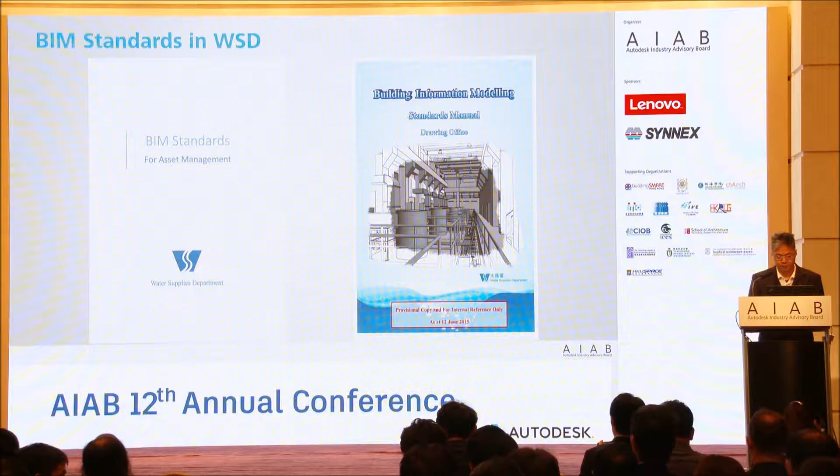Okay, let's get back to the pilot project itself. This is our first project using BIM in our design stage. The lack of reference projects with similar engineering nature and the adoption of BIM workflow has presented huge challenges to our in-house staff. Nevertheless, we have cleared the hurdles one by one. We have gained valuable experience in adopting BIM workflow and resolving problems specific to our project and have realized the benefits of migrating to this new technology.

The scope of our proposed work comprises the construction of Table Hill No. 2 fresh water service reservoir of capacity 24,000 cubic meters, together with auxiliary structures and associated earthworks, pipework, drainage, and roadworks. And we will also lay about 3.3 kilometers of water mains of diameters ranging from 100 millimeters to 800 millimeters.

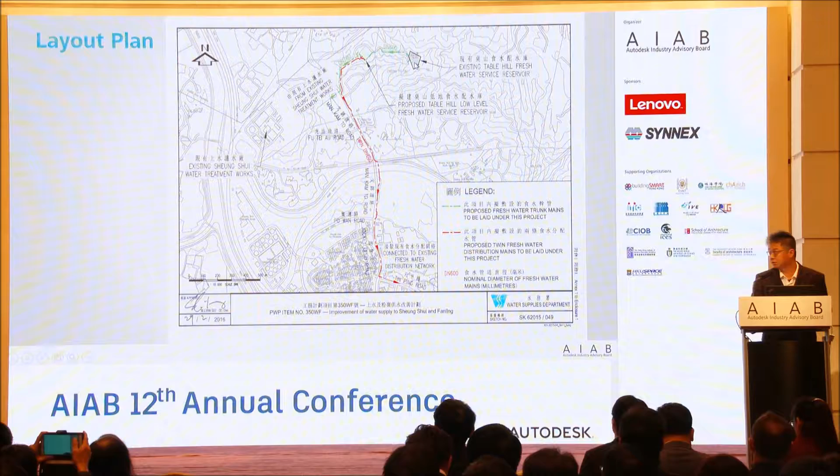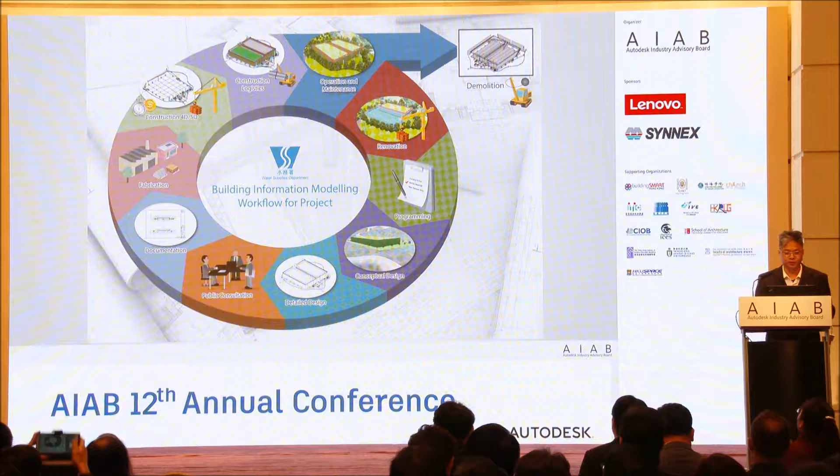This is the layout plan of our project. The proposed service reservoir is highlighted in green in the sketch, and the water mains are in red. And this is our existing service reservoir. We hope to use BIM in the life cycle of the project from planning, design, construction, and maintenance.

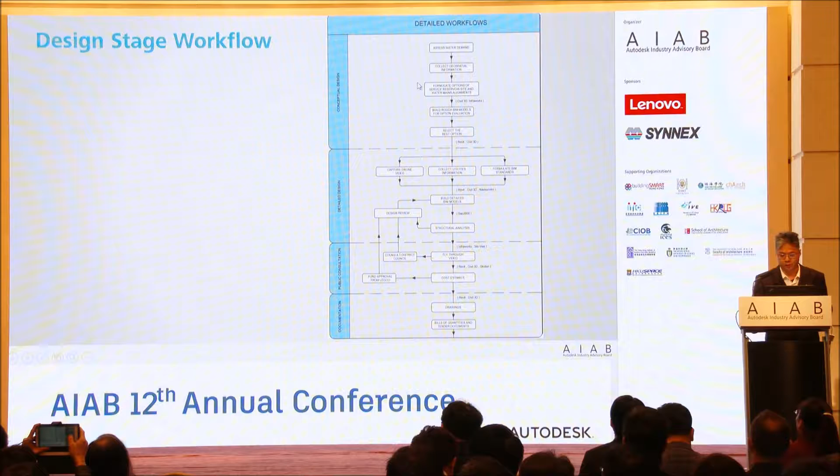We have set up a workflow for the BIM. I'm not going to go into the details. Instead of engaging a BIM consultant, we have a project team on our own for this in-house project. We engaged 4 technical staff to build the BIM model by ourselves. The software we use is Revit for the service reservoir model and Civil 3D for water mains and utility models.

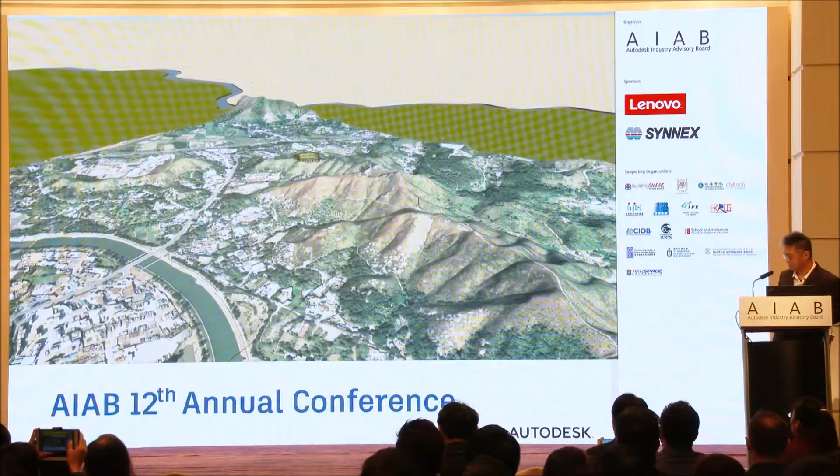Now this video shows the general terrain of our BIM model. We use the topographical data provided by the Lands Department for building this model. And the proposed reservoir is at the middle of the video. Okay.

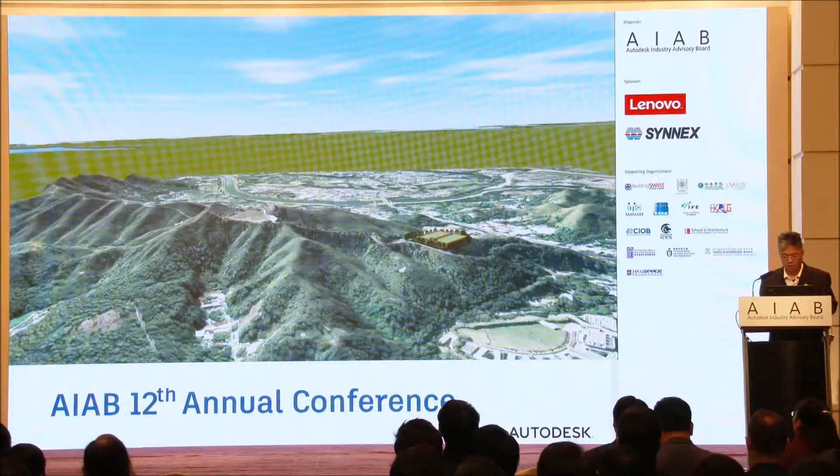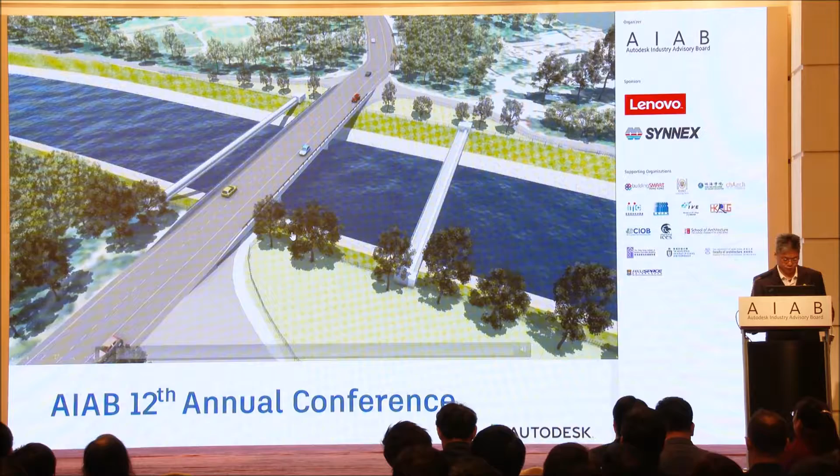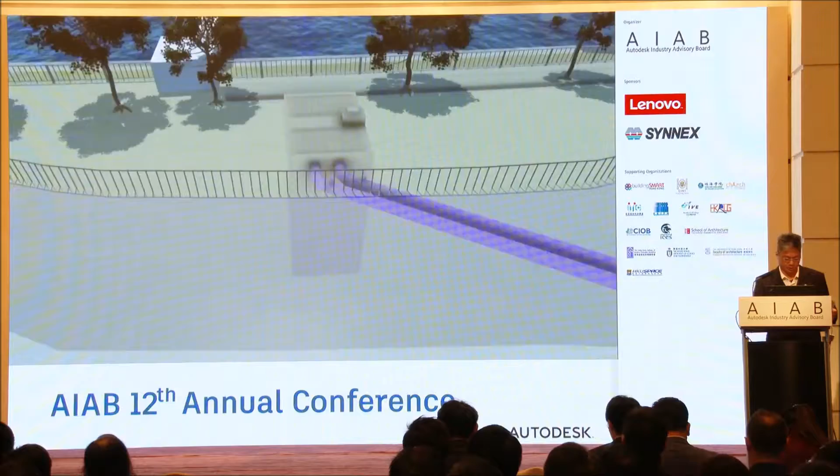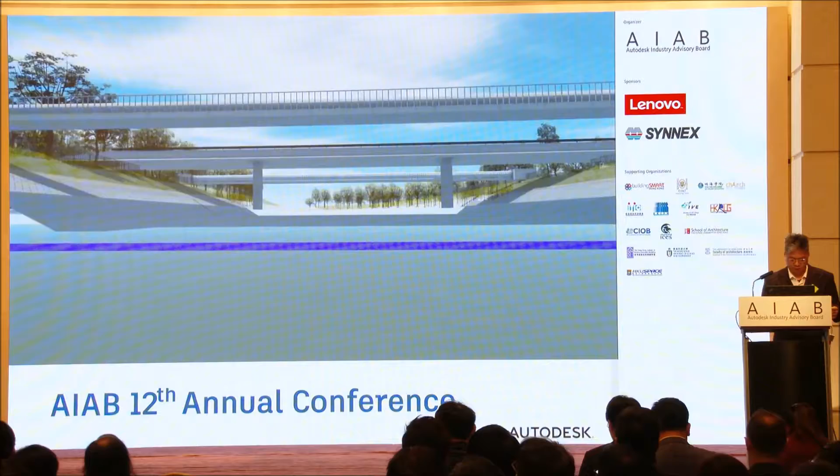The next video I would like to show is the fly-through of a section of proposed water mains, which will be laid underneath Ng Tung River to minimize the visual impact. We have included all details in the model. As you can see, we have included the pipe fittings of the water mains and also the ladders inside the chambers. All the dimensions of the pipes and fittings are based on the information provided by the manufacturers. Okay.

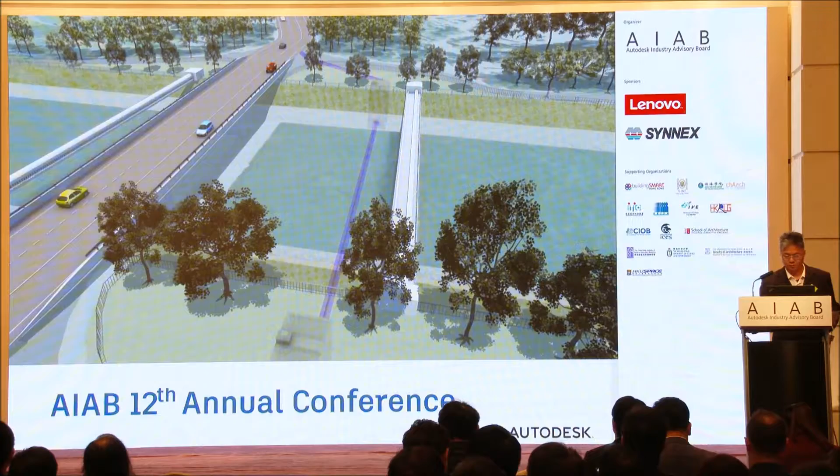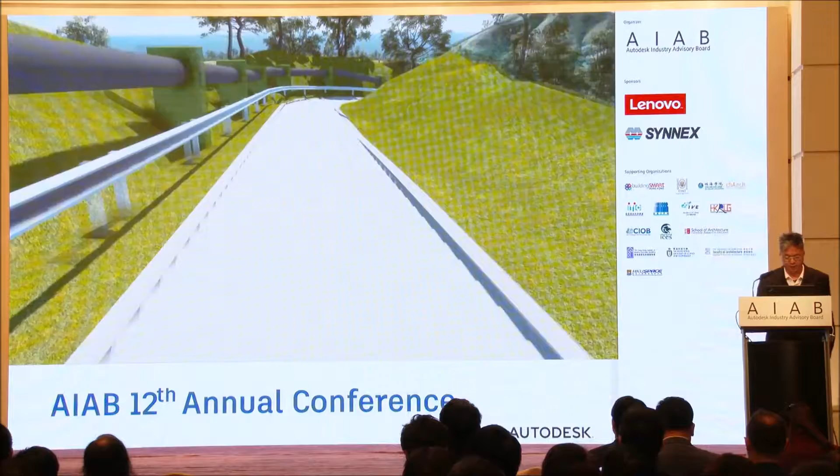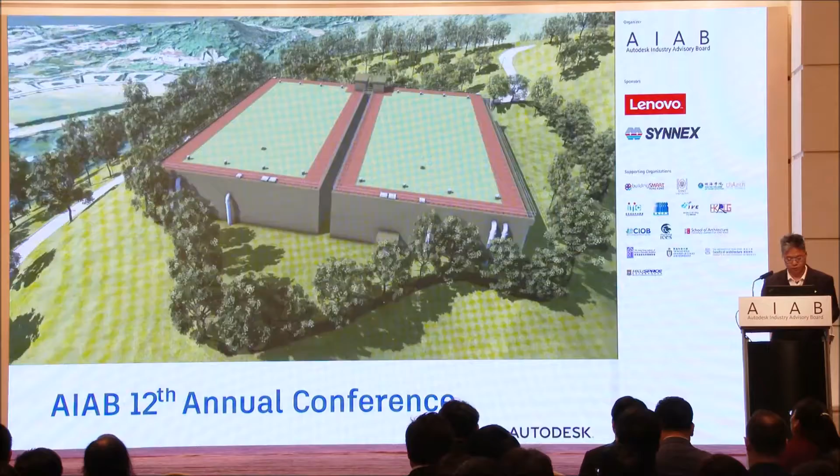This video shows a section of water main which will be laid as exposed pipes. And this is our proposed service reservoir. We have designed the service reservoir in such a way that it can blend in the environment. We will build a green roof and plant trees to surround the service reservoir. The walls of the service reservoir will also be green.

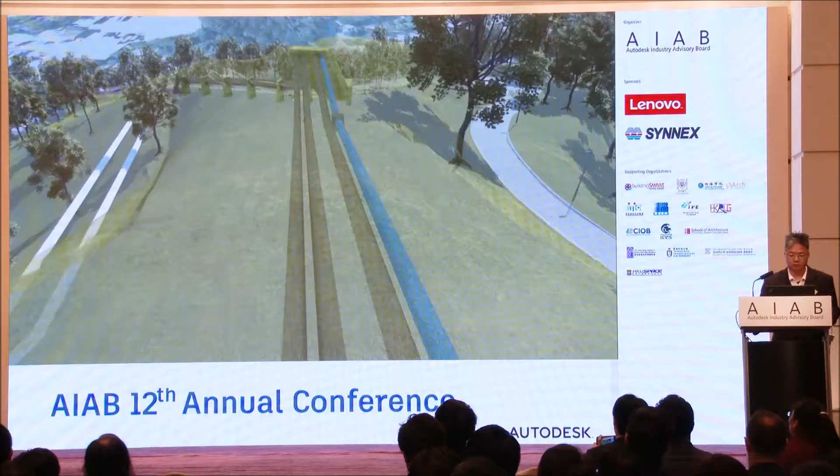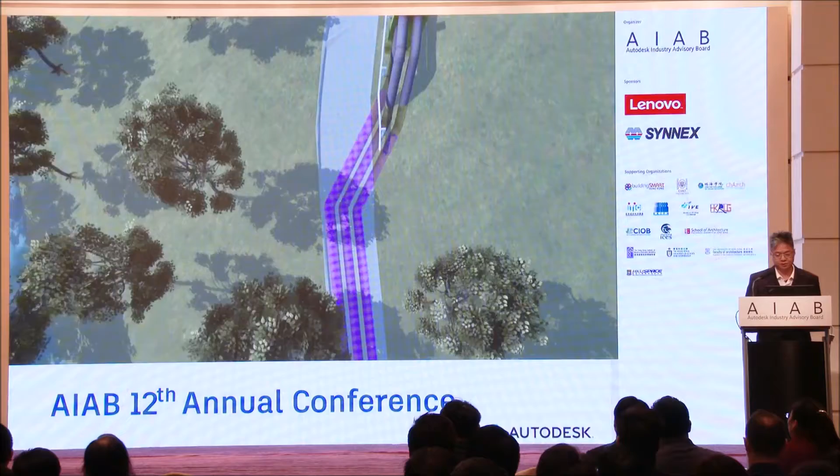And then we have a section of buried water main coming out from the service reservoir, and then going down a pipe trough, and another section of exposed water mains. As you can see, some of the water mains will be purple in color because at the end of the day, our fresh water supply system will be converted into a reclaimed water system.

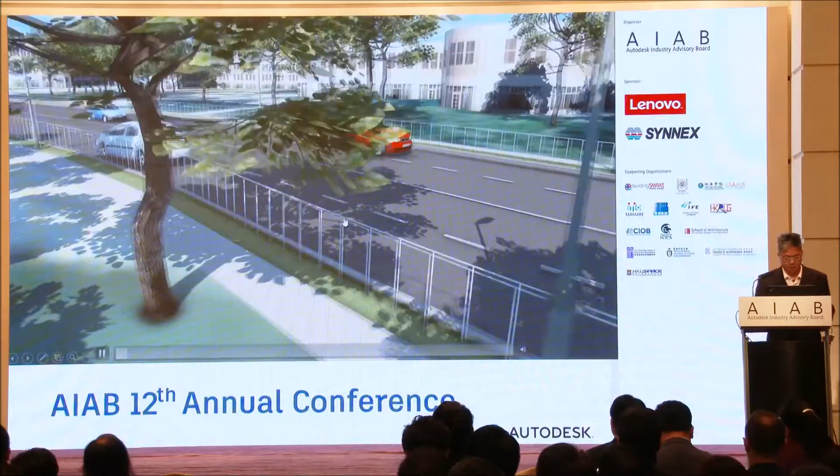This video shows some sections of water main laid underneath Man Kam To Road and Jockey Club Road, which are traffic sensitive. We have included all existing utilities, such as cables and drainage, in the model to perform clash detection analysis.

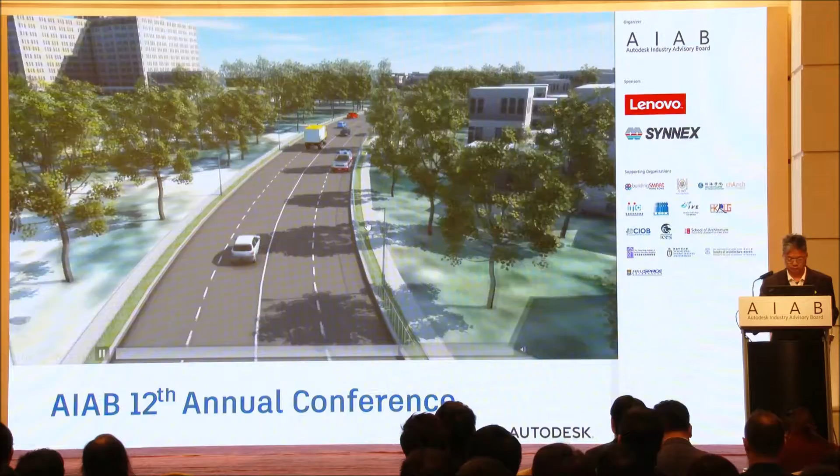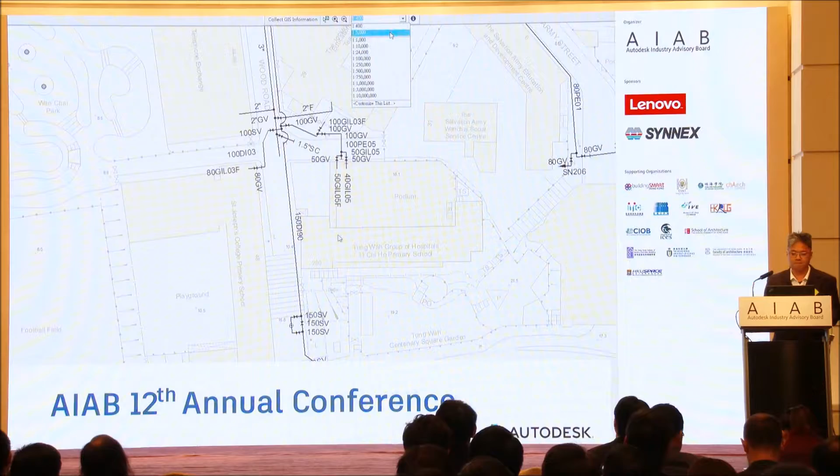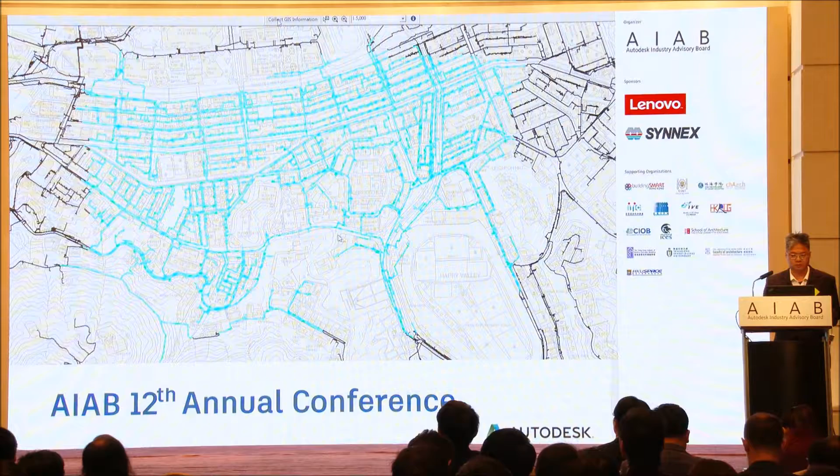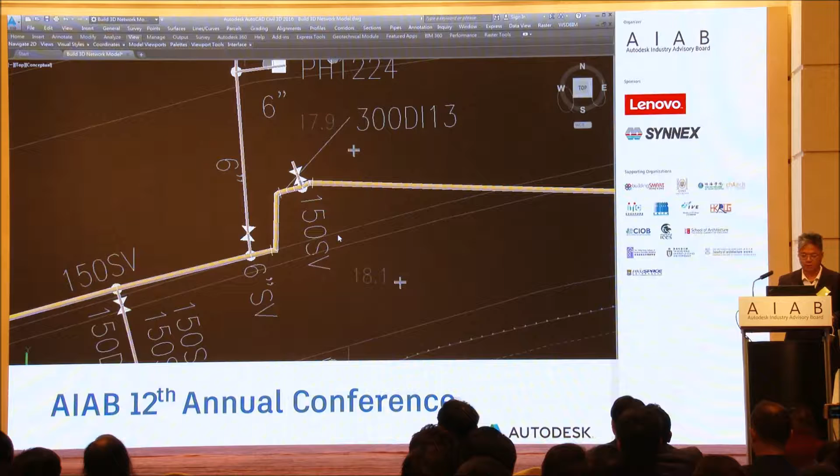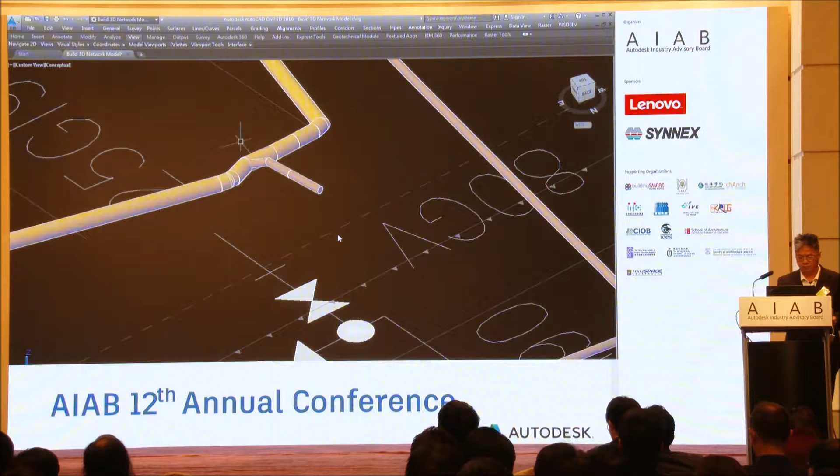Now we select a portion of our water main from GIS, and then we convert it into data in our Civil 3D. So that is it. All the 2D data are now converted into 3D data. And you can see part of the 3D model of the existing water mains. Okay.

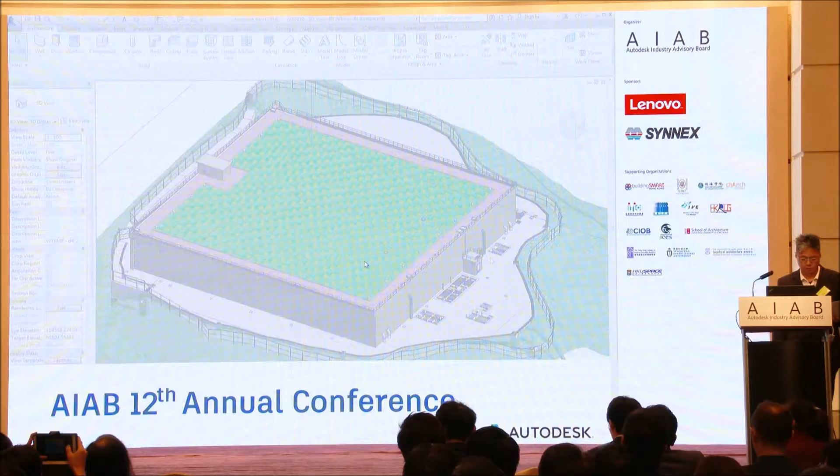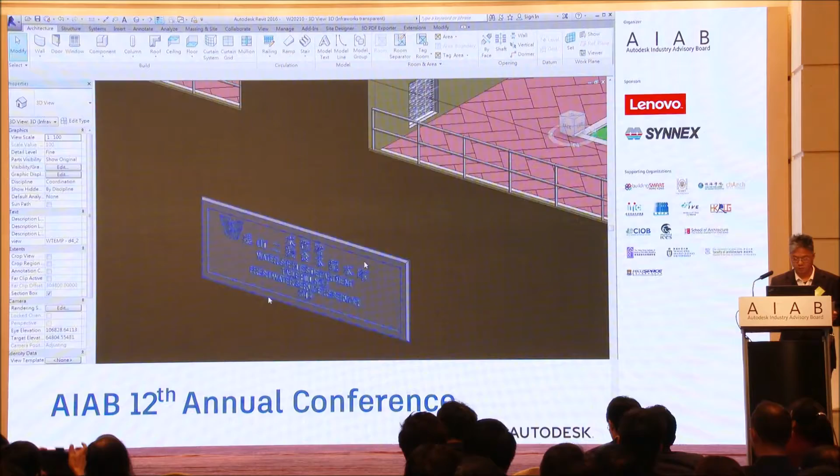The next video I would like to show is our service reservoir model in Revit. We try to include every detail, such as the nameplate of the reservoir, hand railings, pipe works, manholes, subsoil drains, and even the manhole covers.

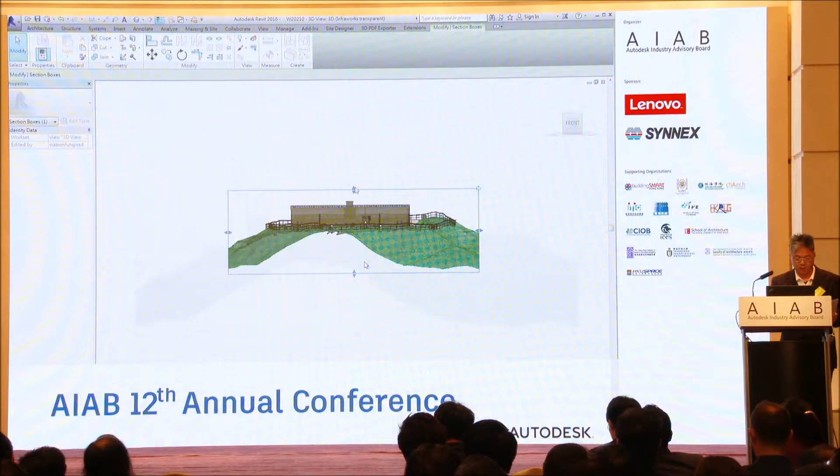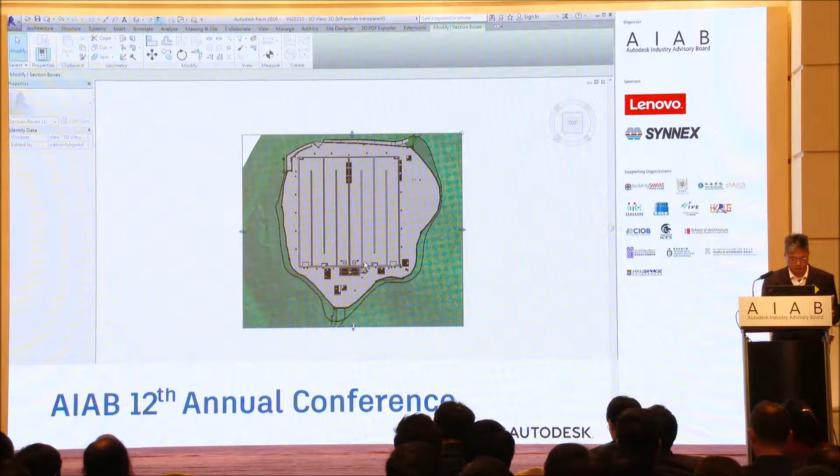By using Revit, we can view the model from any angle easily. We can also cut any section of the service reservoir for preparation of 2D drawings. In fact, all of our tender drawings are prepared by using this 3D model. And we can collaborate with other professions by using the same model.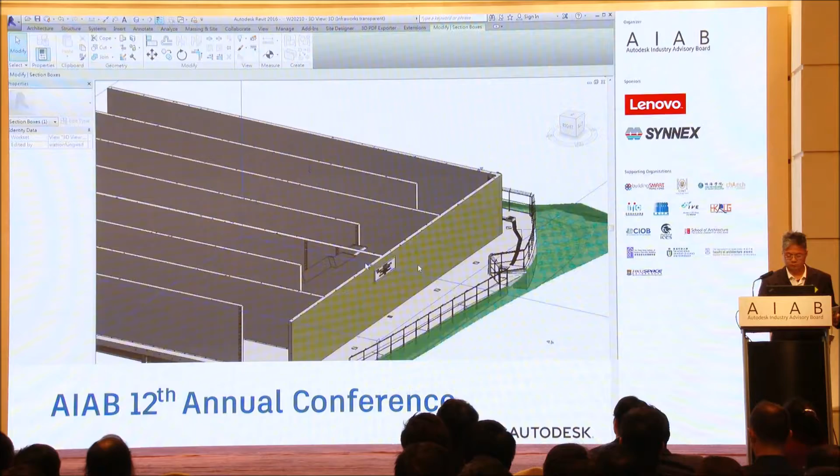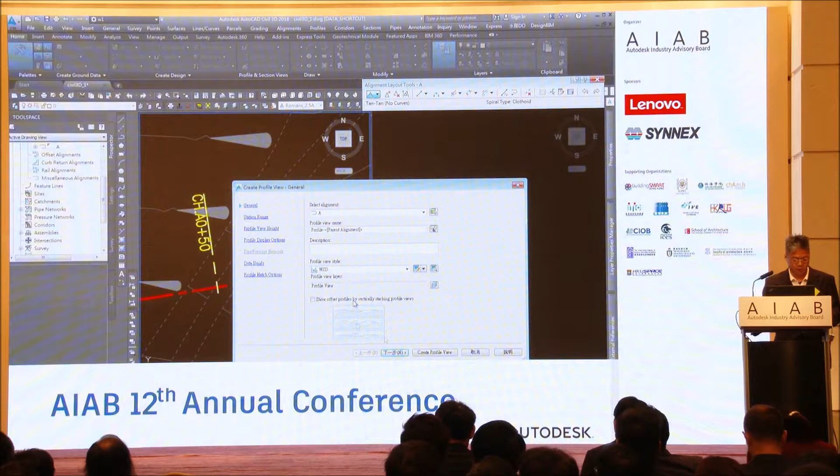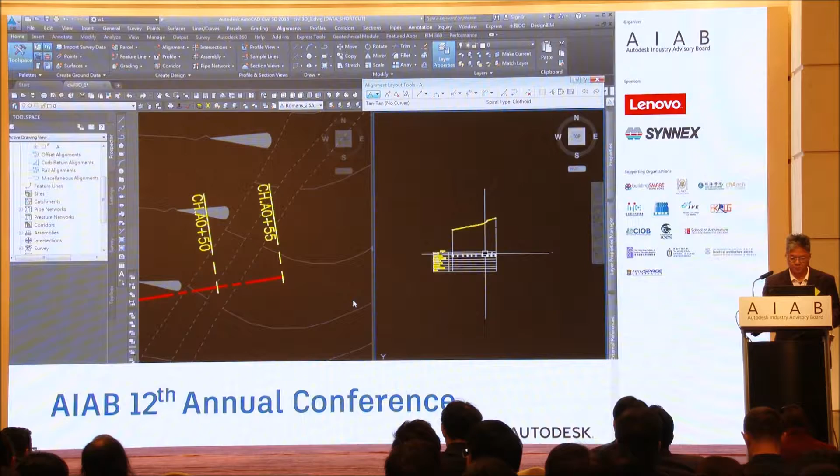The next video I would like to show is the process of how to build our water main model by using Civil 3D. First of all, we draw the alignment of the water main and then generate the longitudinal profile of the water main, the natural terrain. This is the natural terrain along the water main. Whenever we change the alignment of our water main, the profile will be updated automatically.

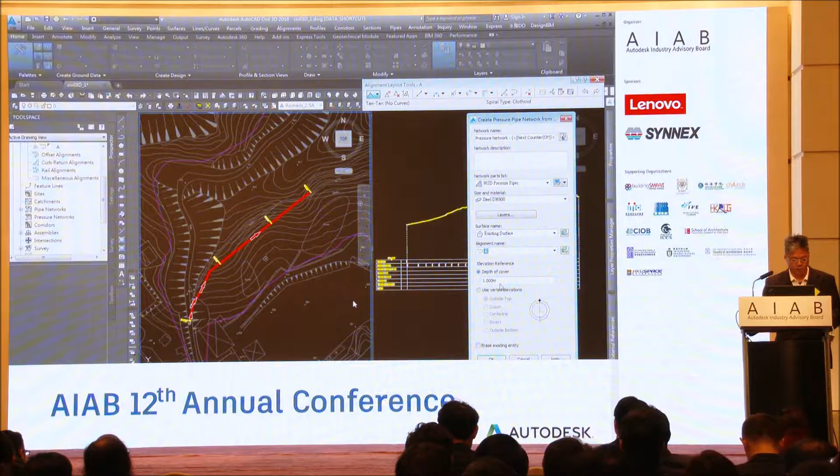And after that, we proceed to build the 3D model of the proposed water main based on this alignment. We define the proposed water main as a pressure network in the model. And we should define existing utilities, such as the existing water main, as solids rather than a pressure network. Otherwise, the speed of the software will decrease.

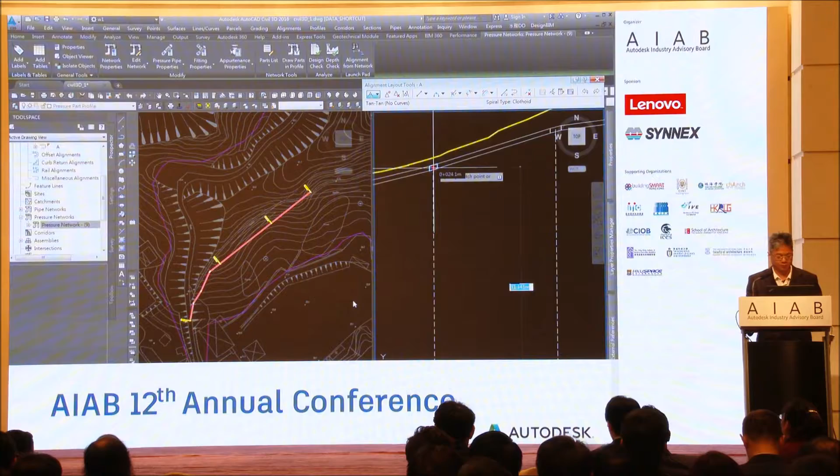After we build the water main model, we can change the longitudinal profile easily by dragging and dropping the pipe bends. The information in the profile will be updated automatically in response to the change. So in fact, this process saves us a lot of time, because in the old days we had to do a lot of update work due to changes in alignment if we used 2D from AutoCAD.

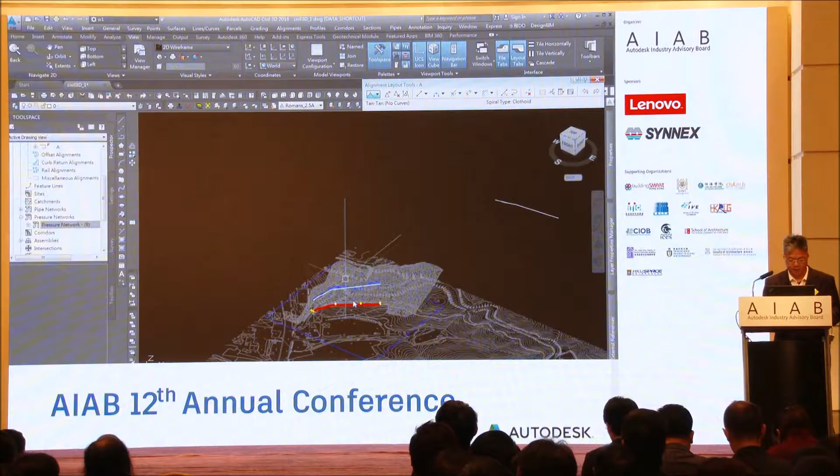We can also view the exposed pipe together with the terrain for assessing the visual impact. After determining the longitudinal profile and alignment, we can proceed to add the pipe fittings in the model.

This video demonstrates how we use Civil 3D to carry out option evaluation for different shapes and locations of our proposed service reservoir. By using the software, we can determine the slope profile of the excavation easily. The slope profile in response to any changes in shape and location of the proposed service reservoir can be reflected immediately. And the volume of excavation can also be determined quickly. All these powerful functions have saved us a lot of time in option evaluation and optimization.

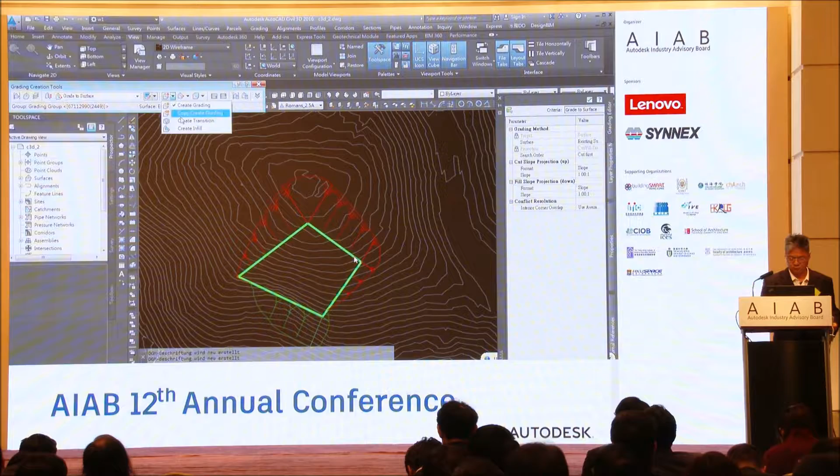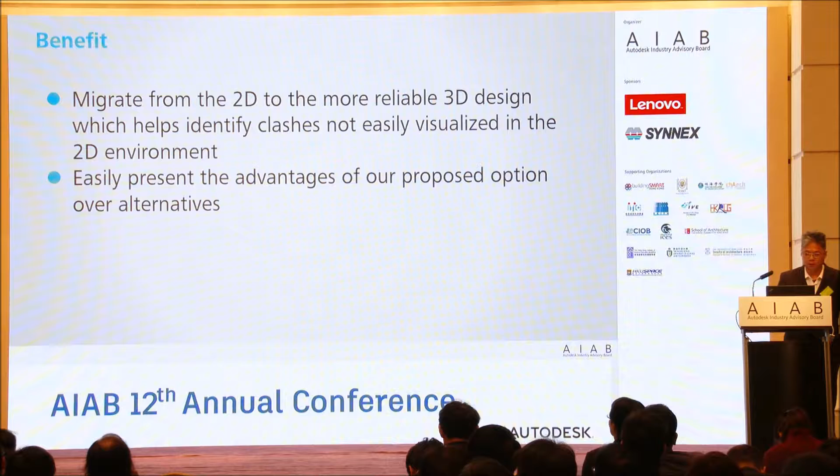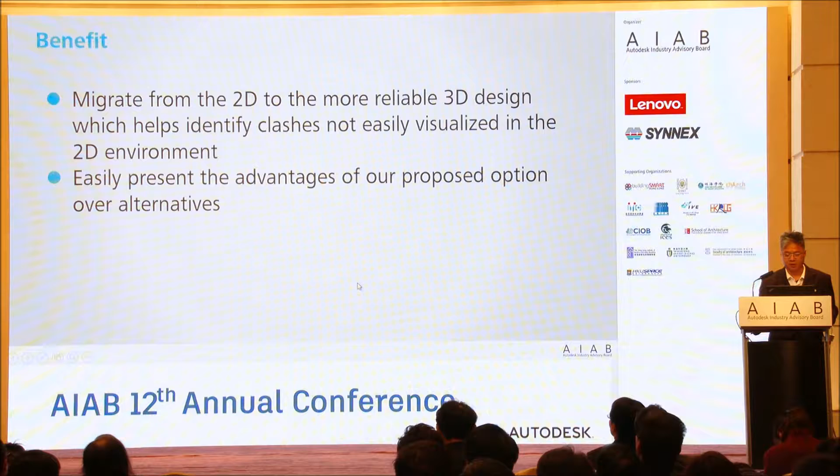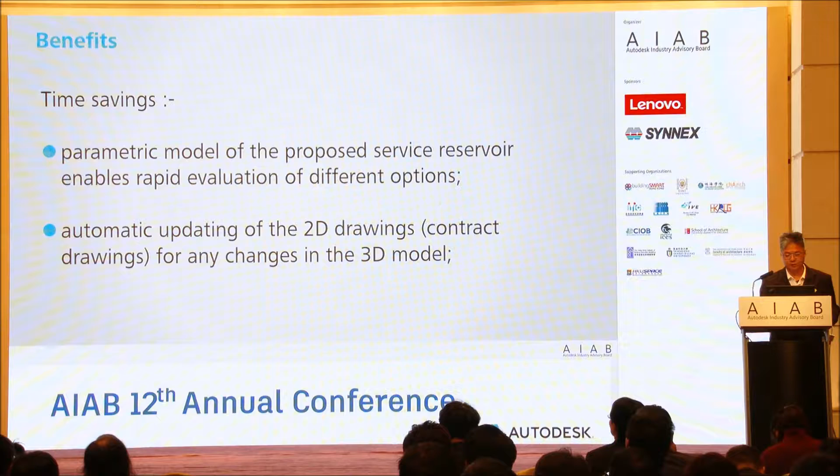Benefits. We find that migrating from 2D to more reliable 3D design helps us to identify clashes not easily visualized in a 2D environment. Also, we can easily present the advantage of our proposed option over alternatives. The parametric model of the proposed service reservoir enables rapid evaluation of different options. The automatic updating of the 2D drawings for any changes in the 3D model saves us a lot of time.

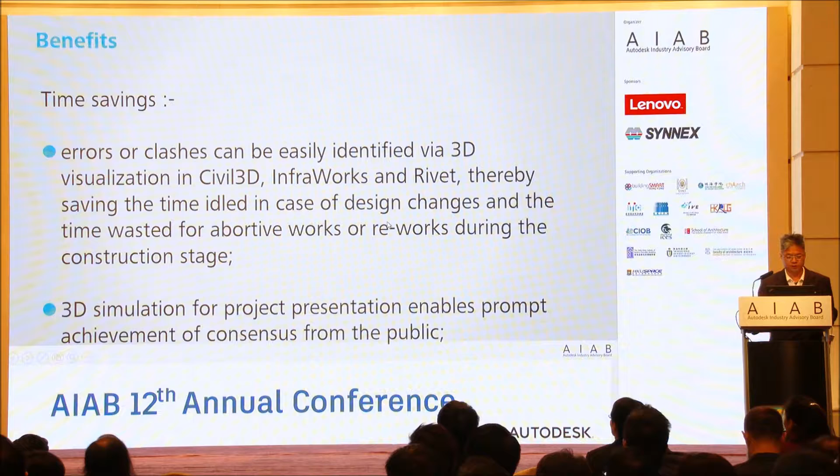Errors or clashes can be easily identified with the 3D visualization in Civil 3D, InfraWorks, and Revit, thereby saving the idle time in case of design changes and the time wasted on abortive works or reworks during the construction stage. 3D simulation for project presentation enables prompt achievement of consensus from the public. It also enables effective communication and collaboration of various stakeholders and expedites problem solving.

The automatic regeneration of longitudinal profiles and updates of chainage for any change in alignment of water mains can be achieved by using Civil 3D. However, apart from those benefits, we have to face challenges. This project has been selected as the first in-house project using BIM. Considerable time is required for solving teething problems, such as familiarization with the software and overcoming the deficiencies of Civil 3D. In general, more time should be allowed for building the BIM model, which is more complex than preparing 2D drawings.

We have set up a small team of 4 technical officers to build the BIM model for the pilot project. Apart from attending training courses and seeking technical support from Autodesk, we have also self-learned by searching for solutions on the internet whenever problems are encountered. Through the joint effort of our team, we have successfully completed the BIM model and just invited tenders for the project last month. We hope that we can use this model to help the construction stage of the project.